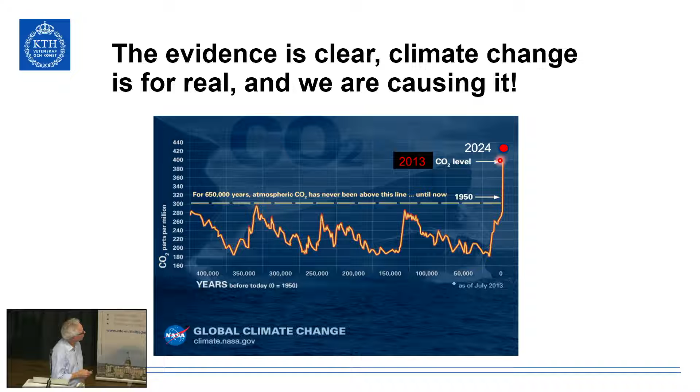And the increase is very, very rapid. This slide is from 2013, and you can see that only during the 11 years since then, the new red dot up here is a lot higher than the end of the line here. So the CO2 concentration is increasing very rapidly.

How do we know that human activities are actually behind this increase? Well, we have models nowadays which we can use to predict the temperature in the world, depending on different factors. With these programs, we can also see what the temperature would have been if we did not have emissions of carbon dioxide and other greenhouse gases. As you can see here, if we did not have carbon dioxide and other emissions, we would have had more or less the same temperatures that we had in 1850. But this is not the case.

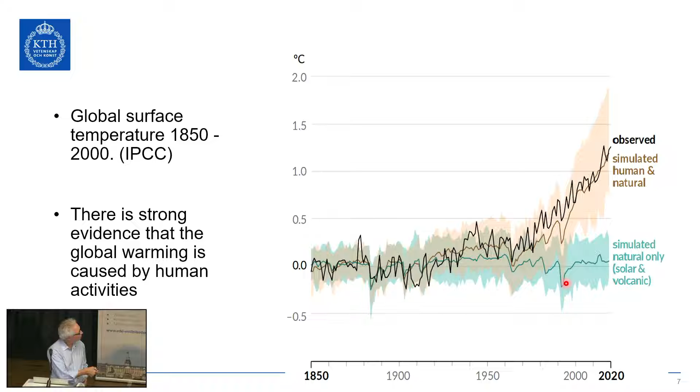And this is not the only thing. This is the sea water temperatures, and down here you can see all the different years since the measurements started, more or less.

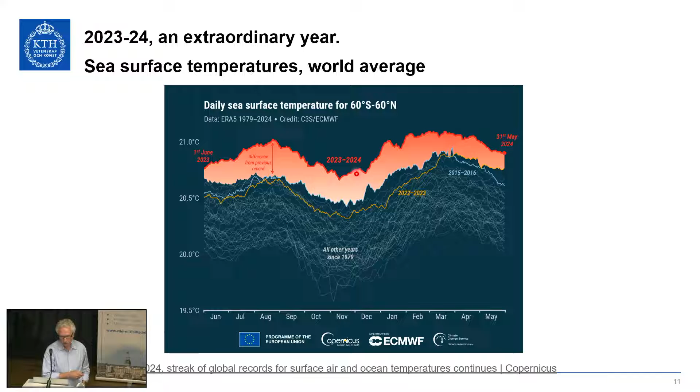And then the red part here is the gap comparing the year 2023 to 24 compared to any other year before. So there has been a drastic increase in the sea temperatures during the last year, a little bit more than a year. And this is, of course, very disturbing. We don't really understand why this is happening either, and that is even more disturbing.

So this is showing the temperatures last year, and actually last year was the warmest year ever recorded with the thermometer, so to say. And just recently there was a release of an article in Nature stating that the temperature during 2023 was the highest in 2,000 years.

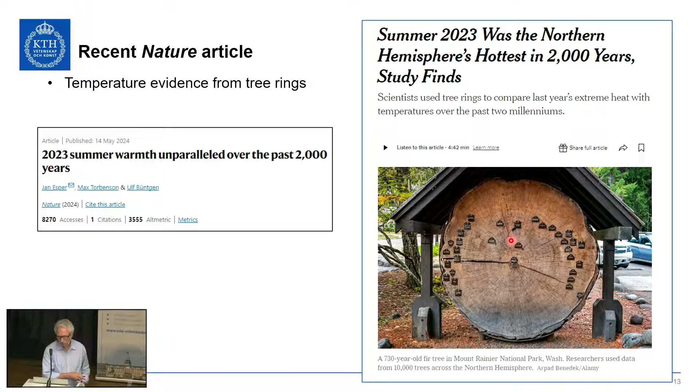And how can we know that? Well, one of the indicators we can look at are the tree rings, like you see on this picture to the right here. So if the weather has been hot, then the trees grow faster, and by that you can tell that the temperatures during the last 2,000 years has never been so warm as during last year.

So yeah, I'll come back to the levels and what we would like to see, or what we hope to see. But the drastic increase during the last year is definitely something which we need to worry about. And this leads, of course, to different problems: heat waves, droughts, wildfires, and all of these are just headlines from different journals which I picked up from last year.

And so many different things happened during the year of 2023, and this has continued into 2024 as well. And you have seen a lot of drastic changes due to this.

The ice shelf around the North Pole is decreasing, resulting in the thawing of the permafrost, which is releasing more methane from the ground, for example.

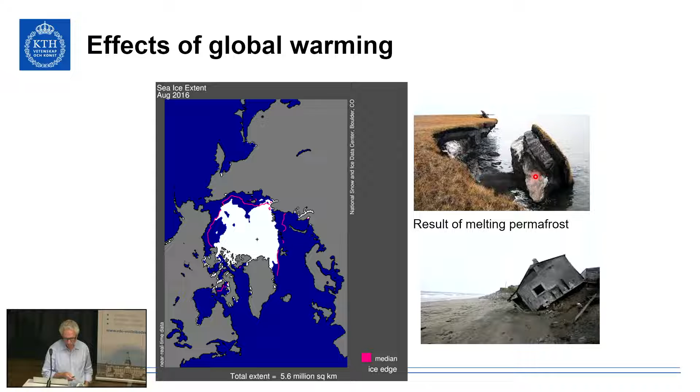But there are also some things which we perhaps do not talk so much about. And this photo shows migrants marching through Central America towards the US. And you could ask yourself, why are they marching towards the US?

Of course, they want a better life. But if they could sustain themselves in a good way where they lived from the beginning, they would not have been moving. And I'm not saying that it's only because of climate change that they try to get to the US, but I would say that this is one of the reasons. And in the future, when some parts of the world will be more difficult to live in, difficult to sustain yourselves in those parts, people will start moving.

And this will also cause social unrest, which is something which we do not talk a lot about. We talk about floods and wildfires and all of these things, but also the connection between global warming and social unrest is something I think we need to consider also for the future.

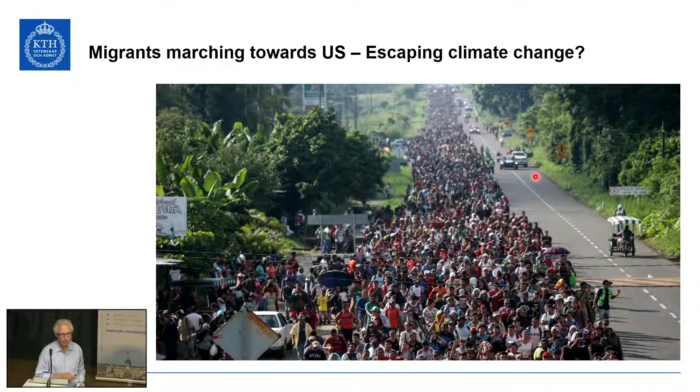So what is the solution? We have seen what is the problem. What is the solution? Well, almost all countries in the world agreed in 2015 to try to stop the global warming. And this was done through the Paris Agreement. And what does that say? Well, the Paris Agreement says that we should try to limit the increase in global temperatures to less than 2 degrees, and preferably to 1.5 degrees.

This means that we really have to phase out all fossil fuels, and we also have to do something to absorb the carbon dioxide which is already in the atmosphere. How we do that, well, that could be another lecture, but there is something called carbon capture. It's a technology being developed, but it's not sure whether we can use it to any large extent yet.

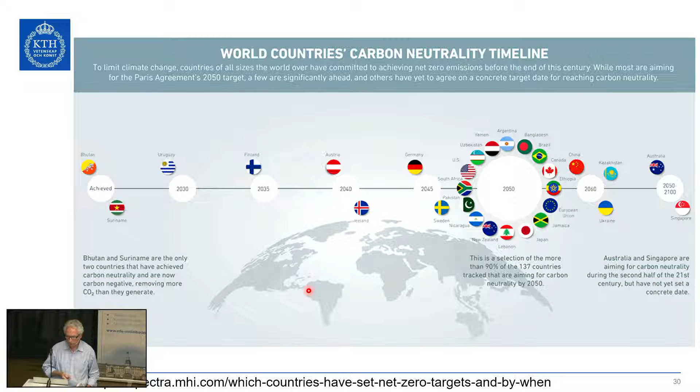This depends on what conditions your country has. If you're depending a lot on coal right now, you have a bigger problem. If you have a lot of other natural resources which can be used, like Sweden does with hydropower and wind power, then it's an easier problem to solve.

So will we reach our goals? One report which came recently from the United Nations raises some concern about this. It is perhaps not possible to reach the goals, at least not if we keep at the pace we are working right now. We need to do more.

So even if we have the Paris Agreement, it seems unlikely that we will actually reach it. And of course, we should not give up just because of that. It's important to work harder. And if we don't reach 2.5, perhaps we reach 2.6 or 2.7. We must continue working on this.

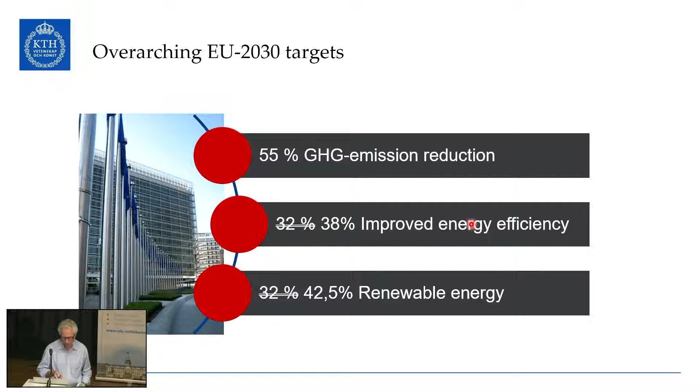Several programs are launched, called the Green Deal, and one part of the Green Deal is called Fit for 55. The 55 refers to a 55% greenhouse gas emission reduction by 2030. Just last year, these goals were made a little tougher: improved energy efficiency was changed to 38% rather than just 32%, and 42.5% should be renewable energy sources, compared to 32% according to the old goal.

So what is the strategy to reach these goals? I will talk about just one important share of energy use, and that is the energy use in the European building sector. Looking at the statistics, about 40% of all energy in Europe is used in buildings, not only for heating or cooling but also for other purposes. And the energy use in buildings stands for approximately 37% of all greenhouse gas emissions.

I would say the most common way to heat buildings in Europe is to use gas heaters. According to different sources, there could be about 100 million or 130 million space heaters in stock, and a large share of these are old with relatively low efficiency. The lifetime of one of these heaters is about 25 years, so it would take 25 years to change all of them to something better. So you can see that the European building sector can contribute a lot to decreasing carbon emissions.

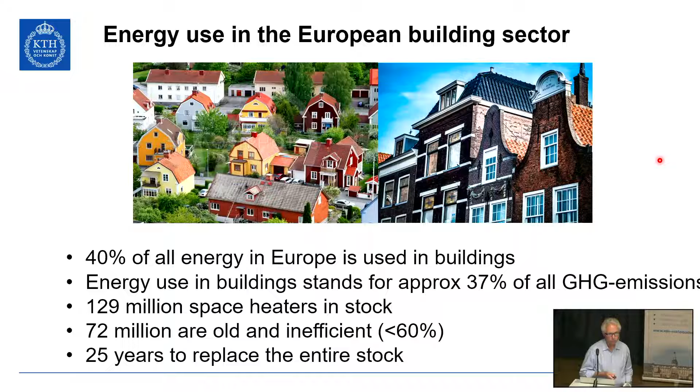I need to talk a little bit about biofuels, because one answer which is often given is that we can burn biofuels instead. But biofuels, that's basically forest or materials from farming. And about the forests, of course, the best way to decrease the carbon dioxide levels would be to allow the trees to stay in the forest, right? Not to cut them to use them for firewood.

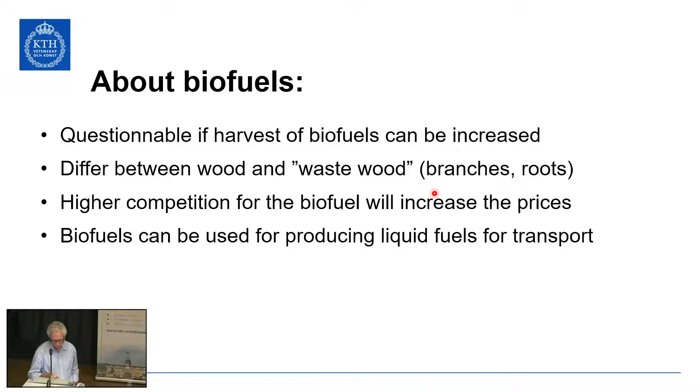In the future, when we try to phase out fossil fuels, there will be much higher competition for biofuels. So we can expect the price of biofuels to increase quite a lot compared to now. We should also remember that biofuels are a good starting point for producing liquid fuels, for example for aircraft or ships. So perhaps we should not use it for just anything - we should keep it for specific purposes, as the resources are limited.

So the reality, in conclusion so far, is that fossil fuels will be phased out - we have to phase them out. Biofuels will not be enough to cover up for the fossil fuels which we don't dig up anymore. And synthetic fuels like hydrogen produced from renewables - that's an inefficient way to heat buildings, at least. It could be used well for other purposes, for industrial purposes for example, but just for heating it would be a very inefficient way to use electricity.

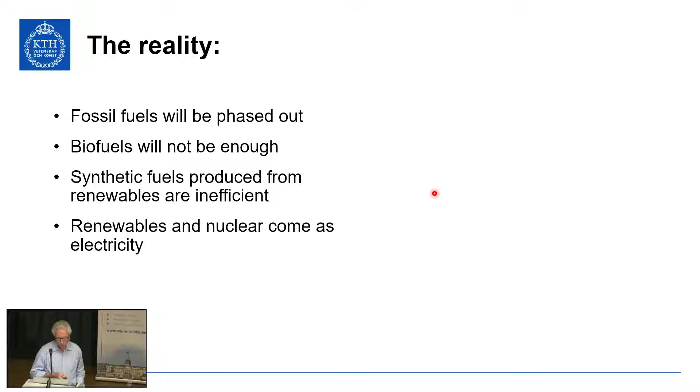And renewables and nuclear, well what is the outcome of those sources? Well, it is of course electricity. So this means that we are moving towards an electric society. We are so used to having pipelines for gas and oil, but in the future we will have a lot of electric lines instead for transferring electricity. We will use electricity for almost everything. We'll even use it to produce fuels sometimes, even though it will not be efficient, but we perhaps need fuels, or we know that fuels can be stored, so for that reason we may keep it.

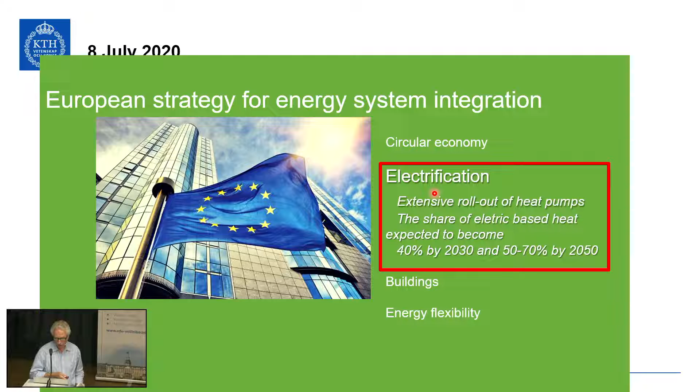And this is also the conclusion of the EU. Electrification is one of the pillars that the European Union is basing its future strategies on. And of course, electrification and heating means heat pumps. So extensive rollout of heat pumps is what is expected within the EU. You can read this in the text coming from the EU: in the residential sector, the share of electricity in heating demand should grow to 40% by 2030 and to 50 or 70% by 2050. And in the service sector, the numbers should be even higher.

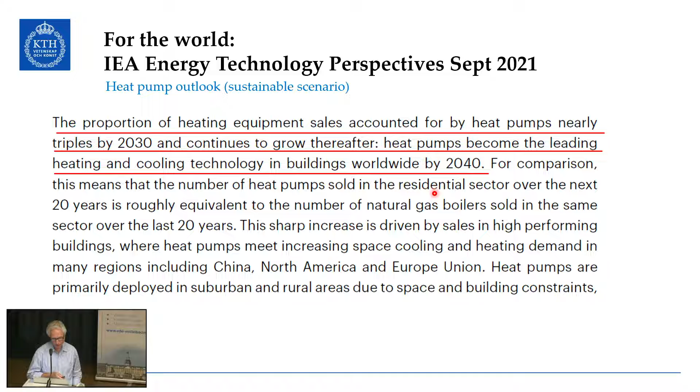So that's the expectation. And similarly worldwide, if we look at the IEA, that's the International Energy Agency, they make prognoses about energy use or the change of the energy system worldwide. They say similarly that the proportion of heating equipment sales accounted for by heat pumps nearly triples by 2030 and continues to grow thereafter. So heat pumps become the leading heating and cooling technology in buildings worldwide by 2040.

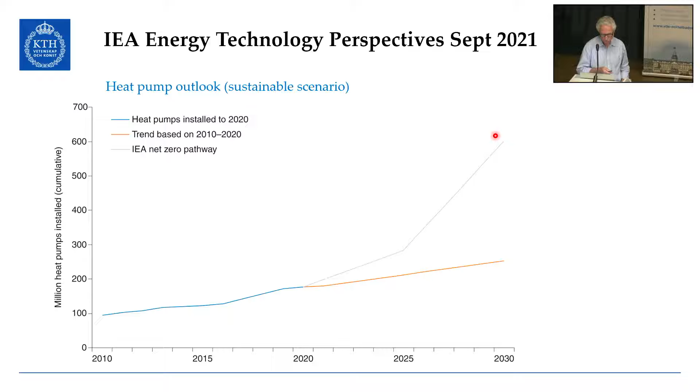In another report from September 2021, they state that we need about 600 million heat pumps by 2030. So it's an enormous amount of heat pumps which should be pushed out onto the market. This shows the trends up to now and how the trend needs to be changed in the sales of heat pumps to reach the goals which IEA thinks we need to reach to be sustainable.

If we look at the sales of heat pumps, it's actually increased quite a lot. This shows the sales in Europe from 2013 up to 2023. As you can see, the growth is more or less exponential, even though something happened in 2022. That was the winter when we had extremely high gas prices and electricity prices as well. A lot of heat pumps were sold that year, so now we're sort of back to normal again. But the trend, the expectation, is that this will increase.

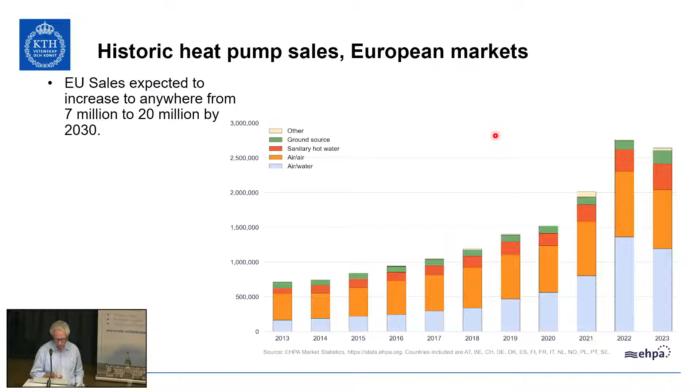This was another source, also European Union. In this source they stated that we should be able to produce or sell 10 million heat pumps by 2027. We were now at 2.5 million, so that's 4 times as much by 2027.

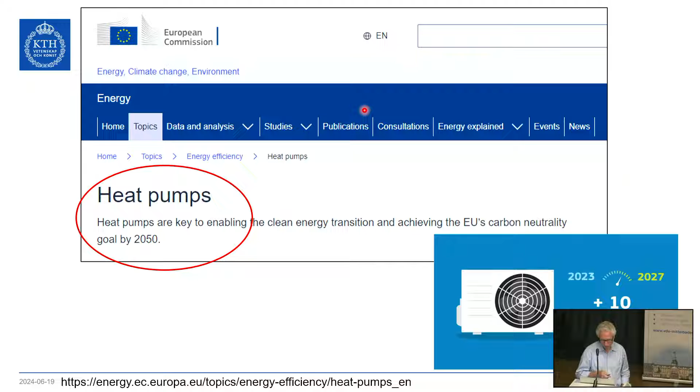The European Union is also working on a heat pump action plan, which will state some policies for facilitating the installation of heat pumps. This should have been taken before the EU elections, and it was unfortunately postponed, so we don't know exactly what will happen now, but it will probably be taken later this year with the new parliament in place.

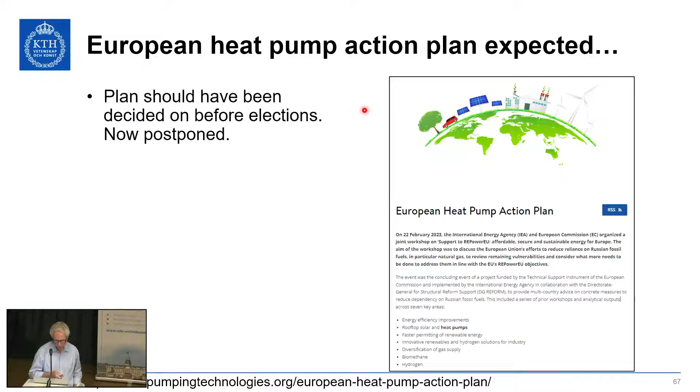But there are some countries where they already took decisions. In France, they have a national heat pump action plan, with a plan of producing 1 million heat pumps per year by 2027. So they have already taken their decision on this.

Of course, there is some resistance against installing heat pumps, and this is mainly for economic reasons. It's more expensive to buy a heat pump compared to buying a gas boiler. So the governments of Europe have introduced some measures to force homeowners to use heat pumps in the future rather than gas burners.

This map shows which countries have bans on fossil fuel boilers. It's difficult to read to the right there, but of course it depends on the country. Sometimes it's from a specific date, and these dates can be different. Sometimes it covers both oil and gas heaters, sometimes it's only oil, etc. But all of the colored countries here have some type of ban against fossil fuel boilers.

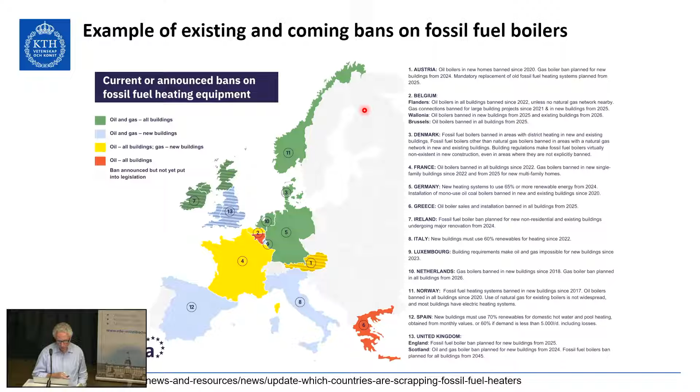If you look at the different countries, you will see that they are very differently mature in their use of heat pumps. The different countries are seen on the left, starting with the Scandinavian countries, Norway, Finland, Sweden, Denmark, and then you can see all the other countries below. This graph shows what the likelihood is that a house owner would buy a heat pump rather than another type of heating system. In Scandinavia, it's more than 90% chance that the buyer will select the heat pump, while in the UK, it's only 3% chance that the buyer will buy a heat pump and not a gas heater. So it's a big difference here between the different countries, and this is something we should recognize.

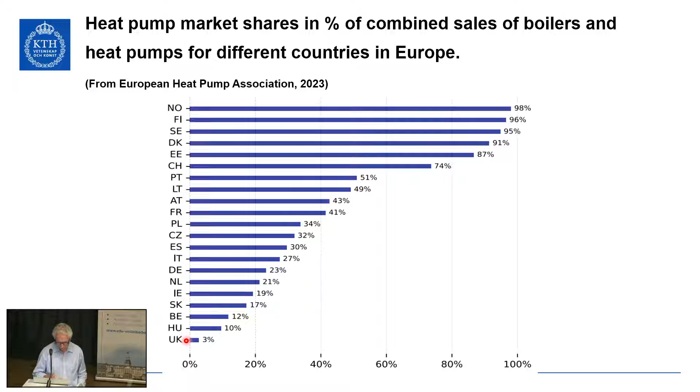But it could sometimes be less. According to the slide I showed before, there are many old heaters which have efficiencies of about 60%. This influences the total use of energy, because if we use energy more efficiently, we can reduce the total amount. So this 70% fossil fuels will be reduced to a lower number if you use electricity rather than fossil fuels. It's the same as electric cars—we know that electric cars require less energy than ordinary fuel or diesel cars.

So finally, what are the obstacles? There are some problems on the way. One problem is what we call F gases. Heat pumps and refrigeration equipment traditionally used what used to be called safety gases, because they were not flammable and not poisonous. But they turned out to have bad effects on the environment. We have heard about the ozone layer, and the newer refrigerants have high global warming potential, so we should try to get rid of them for that reason.

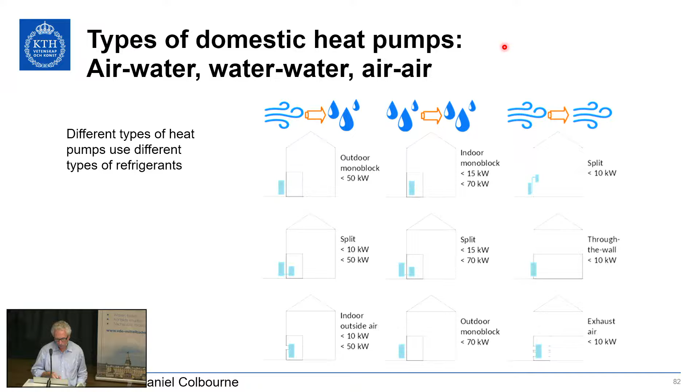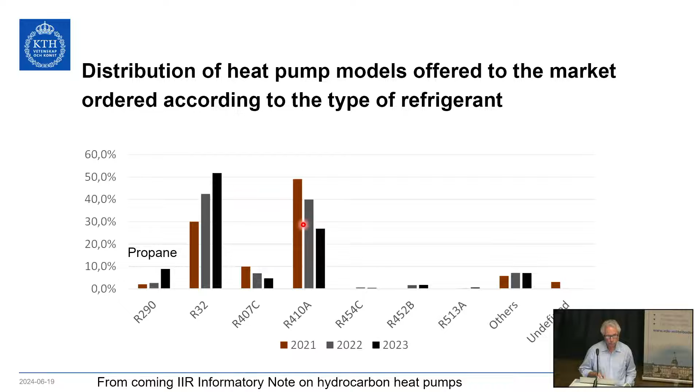R32 is a synthetic fluid which has a little bit lower global warming potential than R410A. R32 is increasing while R410A is decreasing, and then there are some others. Both me and Michael agree that we should try to use natural fluids like propane in the future, and that's much of what our research is about.

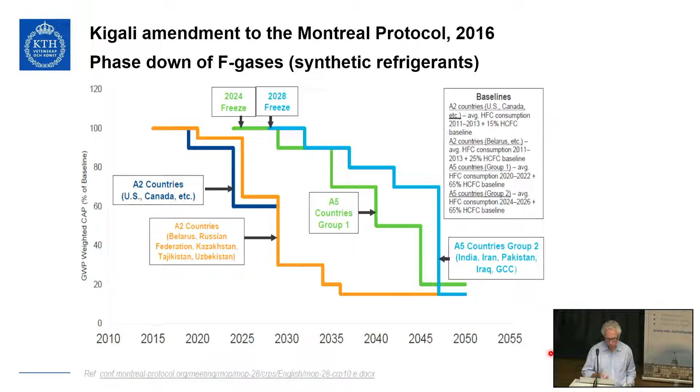We also have international agreements trying to phase out the use of F gases or these synthetic fluids. This is a diagram showing how much the GWP-weighted maximum amount is in different parts of the world, according to what we call the Kigali Amendment to the Montreal Protocol. But in Europe, we also have new regulation from just a couple of months ago called the F-gas regulation.

According to this regulation, we should phase out all use of HFCs, the most common type of synthetic fluids. There's another type called HFOs, which will be allowed and not included in this phase-out. But also for these HFOs, the last remaining type of synthetic fluids, there will be restrictions—small heat pumps, less than 12 kilowatt, small heating systems or refrigeration systems, will not be allowed to use HFOs either.

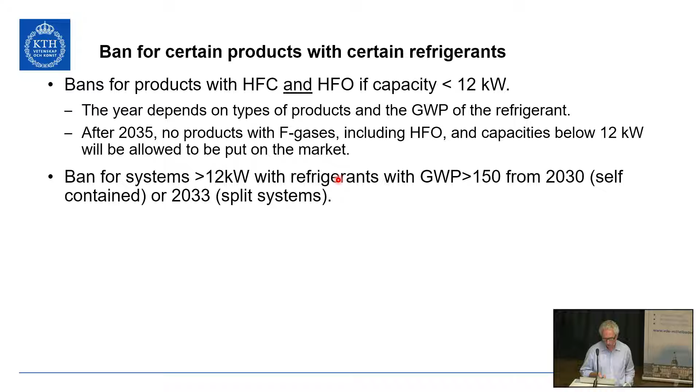So, yeah, there is another problem, and that is what is called PFAS. You probably heard about that in the news.

There is Teflon, you probably know about, and that is one of the PFAS. There is a movie about when they found out that Teflon was actually not so good for the environment. Dark Waters, I think it's called. It's interesting to see. Anyhow, so the PFAS have negative effects on people and on the environment.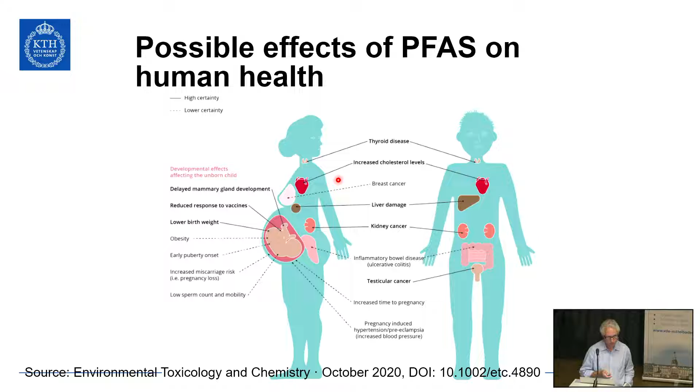That does not mean that all PFAS has such effects, but just to be sure, there is a suggestion in Europe to phase out all PFAS. So this will have a large influence on the phase out of these refrigerants which are synthetic. So almost all of them are considered PFAS.

So how will we handle the refrigerant problem? The synthetic refrigerants are strong greenhouse gases, and they belong to the PFAS group. And if they don't, they could also decompose into PFAS. And the phase out of F-gases decreases the available amount of synthetic refrigerants. And at the same time, we want to increase the amount of heat pumps exponentially, as I showed you before. So this is, you could say, a problem.

We need to develop new heat pumps which can be run on natural fluids like propane. And the natural alternatives, they are flammable, and they could also be poisonous if you talk about ammonia. So this will need to be handled in some way. But we will have to learn to design safe systems with flammable refrigerants. That is my belief. And this is something we work on, both Michael and myself, since many years.

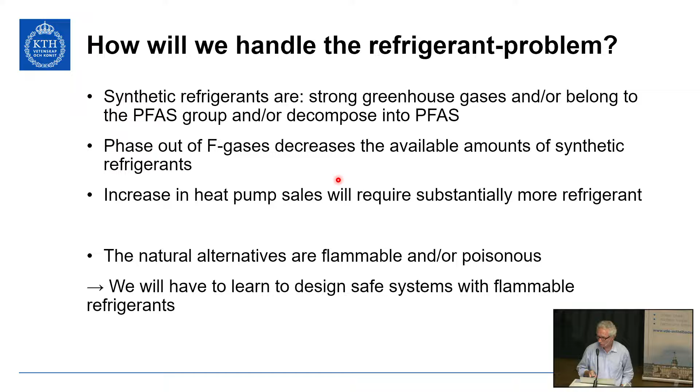So I think I will stop here and let Michael here talk more about the technical details.

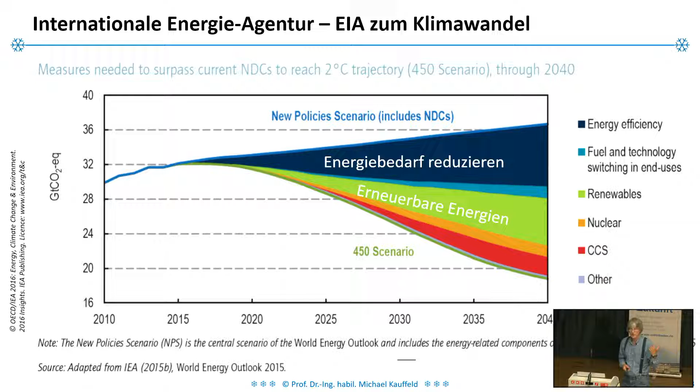This is just to support what Björn said. You can see here the buildings. They are responsible for about 15% of the greenhouse gases in Germany. And this is what the International Energy Agency says. They say that by the year 2040, which is not that far away, most of the savings come from either reducing the energy demand, making buildings more energy efficient, or changing electric resistance heaters to heat pumps. The other part comes from renewable energies, and the heat pump is actually considered to be renewable energy.

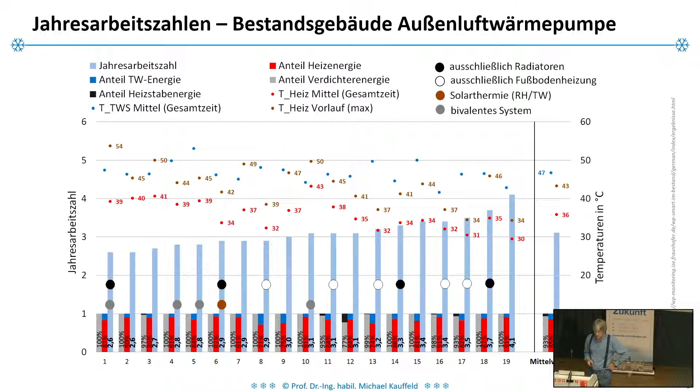Let's look at the coefficient of performance of a heat pump. This is an investigation from Fraunhofer ISE for existing buildings, for a heat pump with air source. On the previous slide, it said something around 2.4. Looking at the light blue bars here, they're all well above 2.4, so that assumption probably has to be corrected to a higher value for the air source heat pump. For water source heat pumps, the value was around 5. The green bars here are all below 5, so that value has to go down a little bit.

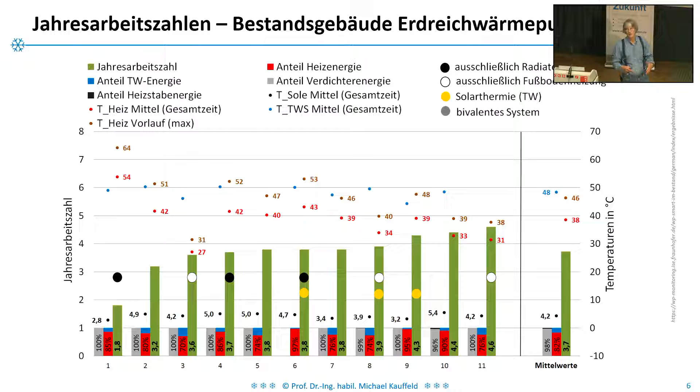There's a very bad or poor reputation for air source heat pumps, especially in Germany, where people always say, oh, you have to drill a hole in the ground, you have to spend 30,000 euros for getting the ground probes done. Bullshit. You don't need that. You can just use an air source heat pump, especially in an area like here in Karlsruhe, where we hardly get any temperatures below 0 degrees during winter any longer.

So put it here on this table for the air source heat pump. The CO2 emissions are probably lower than what is in this publication, but for the water source heat pumps, it's probably a little bit higher.

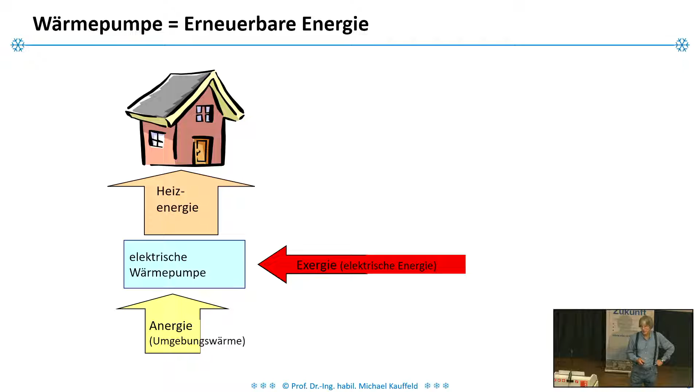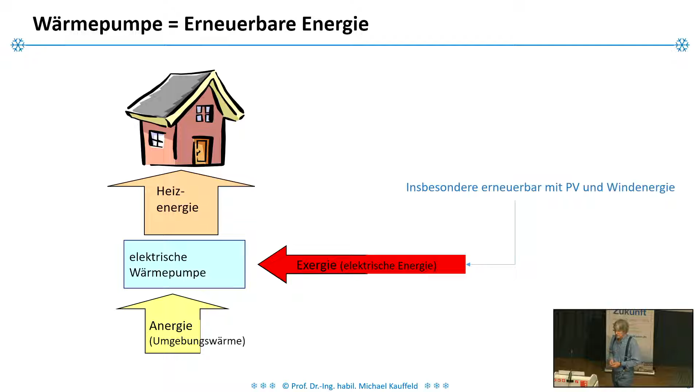Now looking at the fundamentals for heat pumps, this is the way it works: you take some energy from the ambient, you put in some electricity to drive the compressor, and then you can heat your house. It's especially a renewable system if you get your electricity from either PV, wind, or some other renewable power. Heat pumps are nothing new.

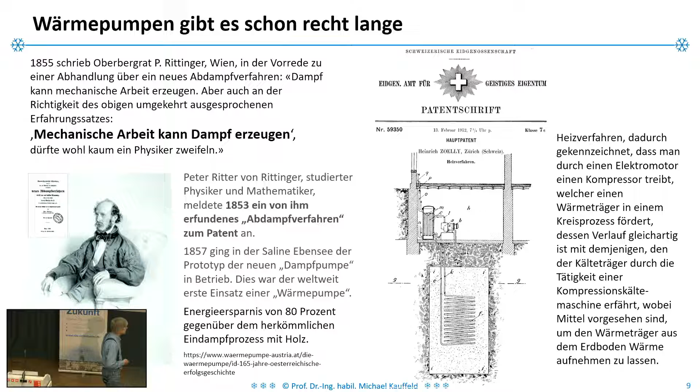This is the first description of a heat pump I found, from 1855, from a guy called Peter Ritter von Rittinger, who installed heat pumps in salt works. The first real heat pump patent I found is from 1912, from Switzerland, and this heat pump is very similar to what we have today. It's a kind of ground probe, but contrary to what we use today, where we have a water-glycol mixture, he wanted to evaporate the refrigerant there directly. This is something my PhD supervisor kind of reinvented in the 1990s, but you can see it was already patented in 1912 by someone, to have the refrigerant going into the ground.

This is one of the first really installed heat pumps, from the City Hall in Zurich in 1942, and another one four years earlier, in 1938. If you think back to what happened at that time, 1938, 1942, this was World War II. There was a shortage of coal in Switzerland, they couldn't get it, so they installed a lot of heat pumps in that period. We saw another boom for heat pumps in the 1970s during the oil crisis. We see like a third boom now, and hopefully this time it's the breakthrough for the heat pump to really take over.

If you've been asking yourself throughout this presentation from Björn and me how a heat pump works, it's just the opposite of a refrigerator. And this guy is asking himself, yeah, now I turned my refrigerator upside down, but it's still not working as a heat pump.

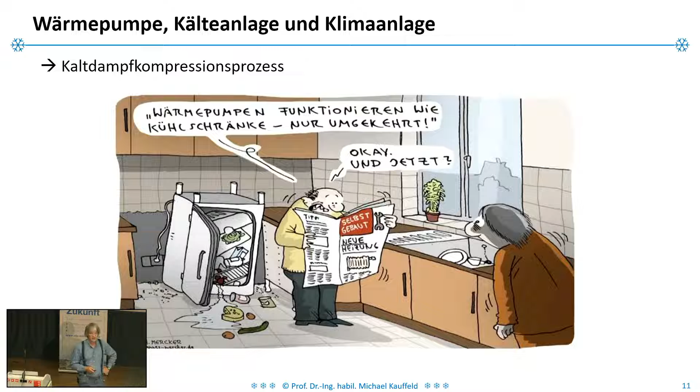So let's look at how the heat pump functions. We have an evaporator similar to what's in the fridge. In the refrigerator, it's inside to cool your butter, milk, or beer. For the heat pump, it could be in the ground, as in this 1912 patent application from Switzerland, or inside the heat pump, and then you supply some heat. In an air source heat pump, it would just be the outdoor air. The refrigerant is evaporating, and as Björn has mentioned several times, the best refrigerant for the heat pump nowadays would either be propane, or could also be CO2 or ammonia, depending on the application. So we call this thing an evaporator, or Verdampfer in German.

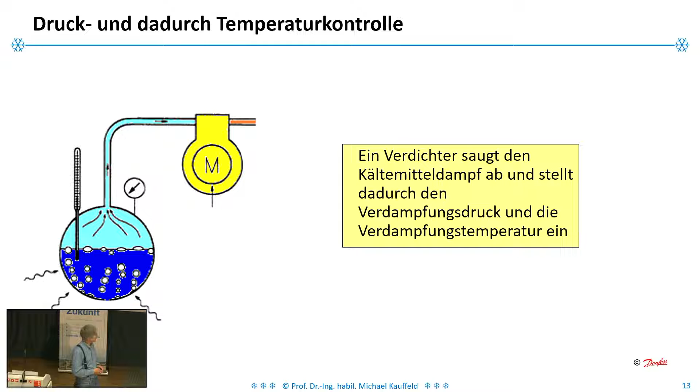The pressure inside this vessel depends on the temperature. And then we have to get rid of all the vapor. We use a compressor for that. This is electrically driven. Typically, in a heat pump, a hermetic compressor is used. We discussed today when we walked through our lab, Björn and I, that the best compressor is one that's very compact, and there are some nice developments from the automotive industry which could be used.

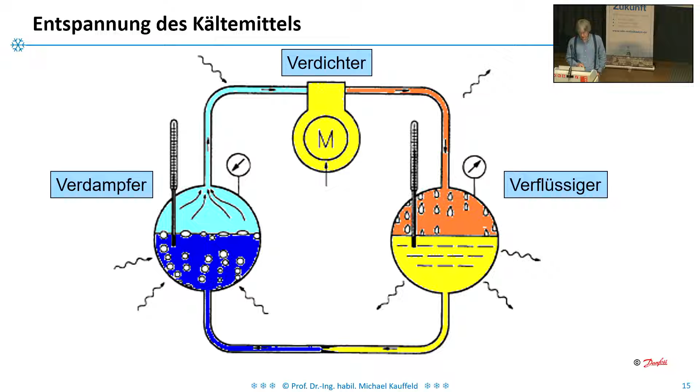Then we have to turn this vapor into liquid. This is done in the condenser, and this is where the heat pump rejects the heat to heat the house or the water. And then we have to connect this to make it a closed cycle, using an expansion valve. These are the German names: the evaporator, the compressor, condenser, and the expansion valve.

This is a little bit more advanced, and I think Björn, you had the same drawing in your presentation, or a very similar one. So this is how the heat pump works, and you can see you can use air as a heat source, or the ground, or groundwater.

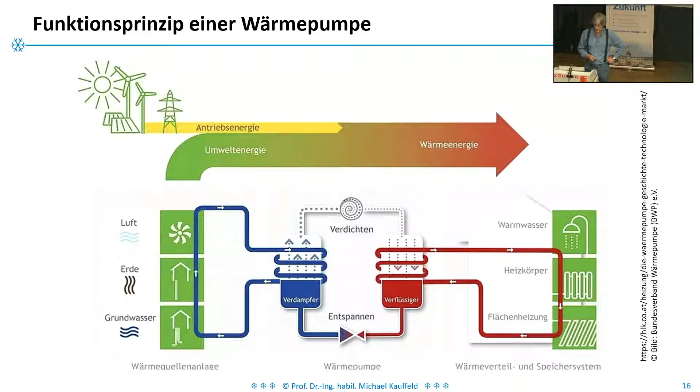This is how heat pumps look like. It could be everything contained in one housing, placed outside, typically placed outside, because you do have the compressor, and the compressor makes a lot of noise, and you don't want that inside your house. A tip: if you want to install an air source heat pump, install it somewhere the neighbor doesn't see it, because if the neighbor sees the heat pump, he thinks it's loud and noisy. If he doesn't see it, he will never notice there is a heat pump.

And then this is a monoblock system, or this is water to water. These can be made very compact. Fraunhofer ISE developed a system with 150 grams of propane. You have an idea, 150 grams of propane?

A hairspray can, like the larger hairspray cans anyone is using — you probably have one in your bathroom — has about 180 grams. So how much propane is in a hairspray can? Or we can start with a lighter, for the smokers among you. How much propane-butane mixture is in a lighter? 1 gram — a little bit more, about 2.3.

In the hairspray can, you have 180 grams of propane. And at Fraunhofer ISE in Freiburg, they managed to build a heat pump with 12 kilowatts heating capacity using 150 grams — less than what you have in a hairspray can. And there are no restrictions on where you place your hairspray can — you can have it in the bathroom, the kitchen, or the basement. But with the heat pump, there's a lot of discussion about whether it's safe to use a propane heat pump.

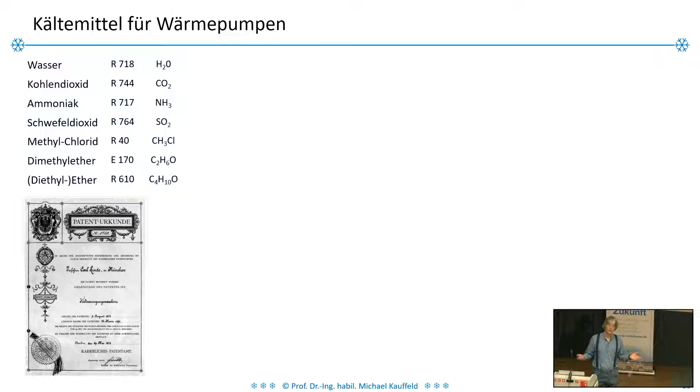Now for the refrigerants: these were the refrigerants in the very early days, all natural fluids, because there was no chemical industry. Then we got the CFCs, and they were used for virtually everything. When I tell my students that we used to clean the condenser of a refrigeration system with refrigerant from the can, they're all like, 'how could you do this?' Everybody was doing it, because all the spray cans — hairspray, deodorant, everything — used CFCs as a propellant. This was normal until the 1970s. Actually, the US was the first country in the world to say you could not use CFCs anymore in spray cans, in 1976.

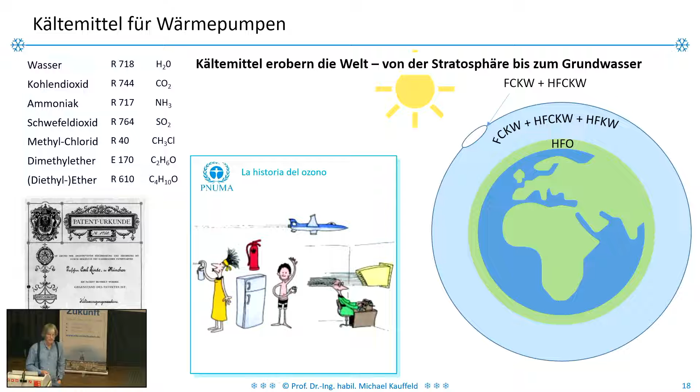So those synthetic refrigerants brought us the ozone hole, they brought us global warming, and now the new fluids, HFOs, they even bring us to destroy the freshwater sources we have. You can see here that refrigerants have conquered the world, from the stratosphere to the soil, to the ground, and this is for sure not sustainable.

The difference is 134A only has 20% TFA formed in the atmosphere. This 1234YF forms 100% TFA, so it's 5 times more. The other difference is that 134A has an atmospheric lifetime of 14 years, so whatever you blow into the atmosphere here in Karlsruhe will break down in South Africa, in Australia, in Antarctica, somewhere on the globe, but not here, because it takes 14 years.

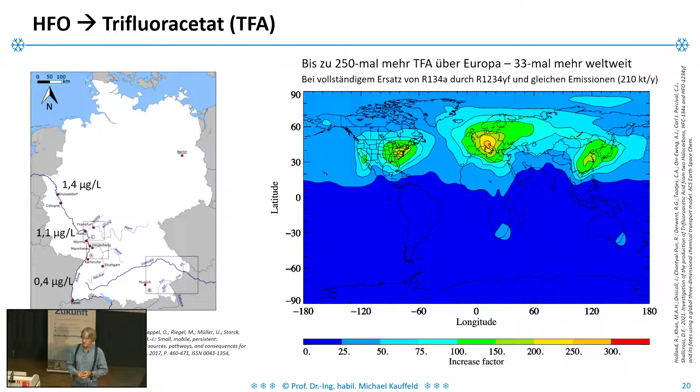Because of that, there's this proposal from 5 European countries to the EU to outlaw not only TFA, but all different kinds of PFAS, all these forever chemicals. And there's a similar announcement from California, and there are also things going on even in China on this topic. So we will see what happens.

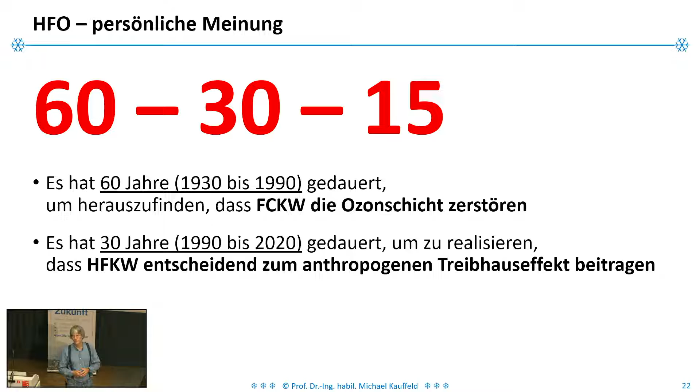This is my own personal view on those HFO refrigerants. Some of you may need a pocket calculator for calculating this, but this is the wrong way to use a pocket calculator for an easy thing like this, but our daughter does. The other thing is, this is not a calculation. What I mean is, it took 60 years to figure out that CFCs damage the ozone layer, and then the replacement fluids, the HFCs, contribute to global warming, and that took 30 years. I say it will take about 15 years to get rid of the HFOs again.

The first time I showed this slide is now 7 years ago, so there are maximum 8 years left for the companies manufacturing these chemicals.

Luckily, there are alternatives. We can have CO2, we can have ammonia, we can have propane, or isobutane as you have in your refrigerator at home. There you can actually check. There are small nameplates where you can see what the charge is, how much isobutane is in your refrigerator. Any idea how much it is approximately?

So we said 2.3 grams in a lighter, 180 grams in the hairspray can, so in the fridge, a small fridge has 25, 30 grams. The larger ones maybe 70, 80 grams. And the limit is at 150, because 30 years ago they said the typical kitchen has this size, and the maximum isobutane level you want in your kitchen is 8 grams per cubic meter, and then they came up with 150 grams. So if you have a smaller kitchen and you leak the refrigerant, you may have a problem. And if you have a larger one, then you never have a problem.

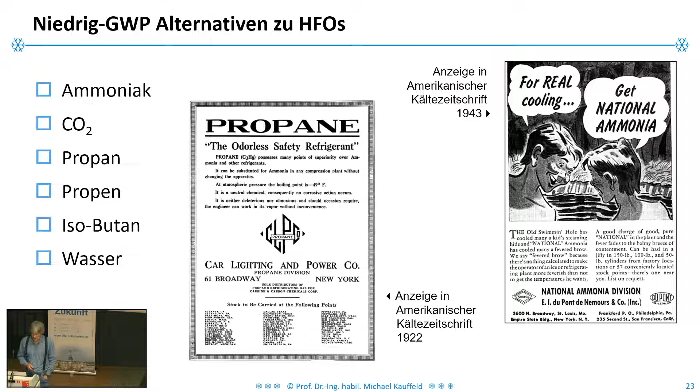So they take the water from the North Sea and pump it up with the CO2 heat pump to supply all the houses in Esbjerg with heat. If you're interested in that, you can listen to the presentation on the 7th of November. There will be someone coming from Norway who is on the project team. They will present this heat pump at our Energy for You.

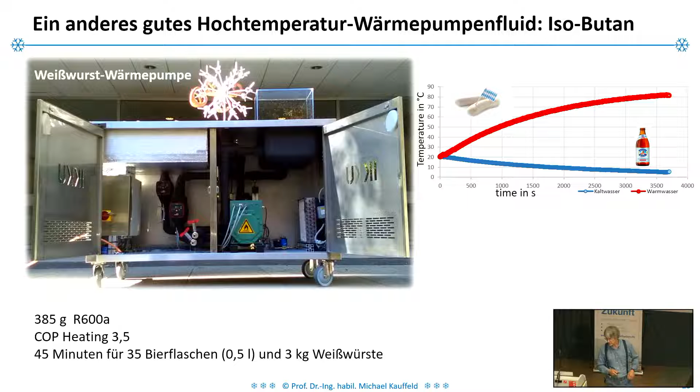We used that. We were last week in Frankfurt at the Achema with this thing. You can see down there, you have 385 grams of isobutane, so it's well below the 500 gram limit which is now set for commercial applications. The nice thing is you can only do this with isobutane. We have an evaporation temperature of -2 and a condensation temperature of +95. It's not possible with any other refrigerant in a single stage process. This was when they had their final presentation, and of course they got the highest grade.

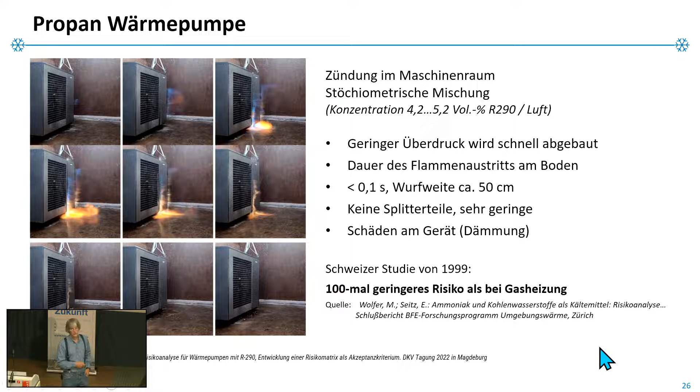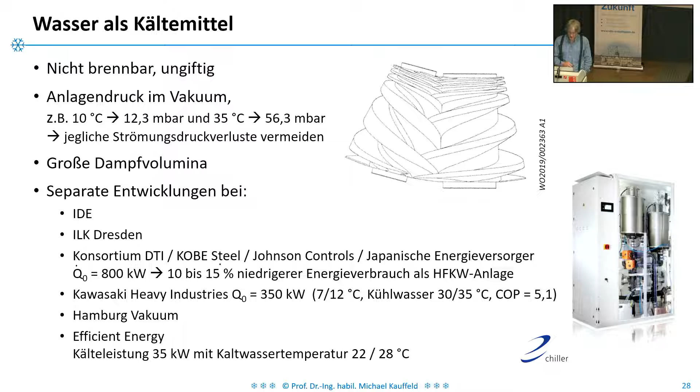If you do have some doubts, then you could go to water. It's the perfect refrigerant because it's not flammable and not poisonous. But if you look on a worldwide basis, there are more people dying because of water in their lungs than people dying with ammonia in their lungs or with a house exploding due to propane. So actually, water can also be very dangerous. There are some companies listed there who are working with water as refrigerant.

And the one I want to show you is this one. It's my former colleagues, I used to work in Denmark. That's also why I can speak Danish, unfortunately not fluent Swedish, but we can get along. Tonight when we sit in the restaurant, after the third beer, Björn and I can talk a fellow Scandinavian language. This is a heat pump installed in Aarhus, also for a district heating system.

They use water as refrigerant, and also the heat source is water. They use the water from the harbor, and the first stage is a water vapor compression heat pump, and the second stage is an ammonia heat pump. You can go there, it's like an open museum. If you ever make it to Denmark and to Aarhus, go down to the harbor. It says on the outside, Maskinhuset. You can go inside and have a look and see how the system is working.

And there you see the gray part is the water heat pump, and the green part is the ammonia.

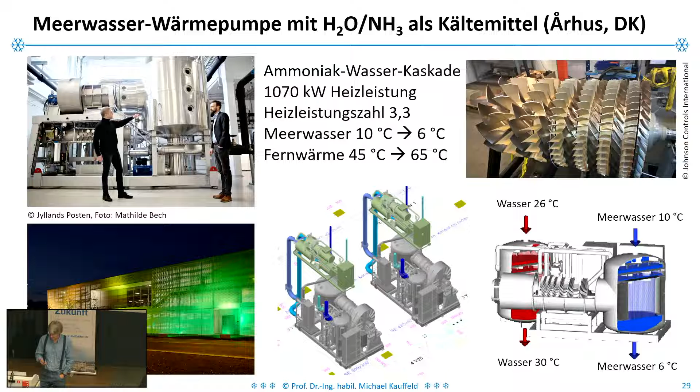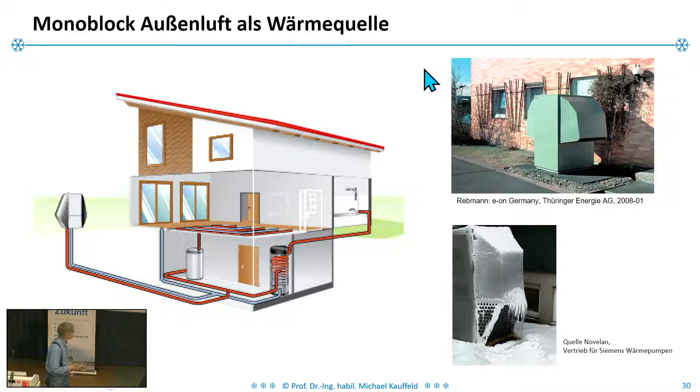Åke Melinder told me once they had a case in Sweden in a hospital with this ground source heat pump running on water ethanol, that they had a leak and couldn't find it until they figured out there was a small tap for taking a sample, and this tap was in the department for the alcoholics, and they were actually drinking it.

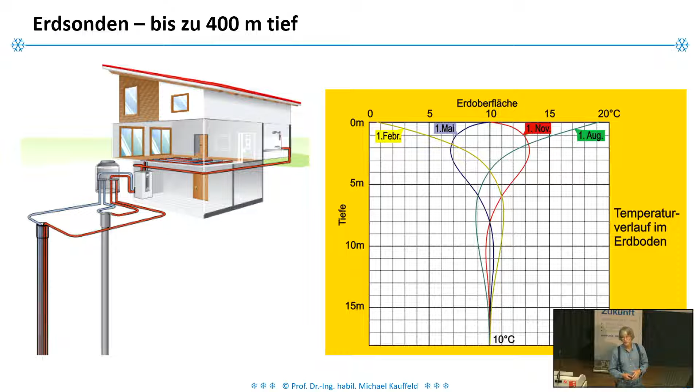And this is the typical ground source heat pump where you have ground probes in the earth, and we had here at our university a nice project some years ago. We developed a measuring system: a very small ball or sphere which can float through this ground probe and take the exact temperature distribution throughout the ground.

This is something you can also do. It's like you have one central heat pump making the first step, and then you distribute the heat in a ground network, but at a temperature of maybe 15 to 20 degrees, not 70 like a district heating system. So the heat losses in the ground are smaller, and then in each individual house you have a small heat pump. The way they do this in Fischerbach and in Bleichach is with a seasonal ice storage, and they freeze the ice, it's called ice on coil.

So they have some plastic piping inside a very big vessel filled with water. The plastic pipes run a water glycol mixture inside, and this mixture is then going to the heat pump, to the evaporator, as the heat source for the heat pump. So you have several heat exchangers.

The efficiency is not very good, and we had a European project until last year, or 2 years ago, with something like 10 partners, where we improved this system. We removed all the plastic pipes in the storage vessel and just had the evaporator of the heat pump itself produce supercooled water.

You may have experienced supercooled water yourself. Take a plastic bottle, place it in the freezer, and cool it down to -4, -6 degrees, and it's not frozen. Then you open the lid, and the CO2 initiates the freezing process, the crystallization process. That's exactly what we did in this European project: we cooled the water down below the freezing point, and then afterwards we had the crystallization.

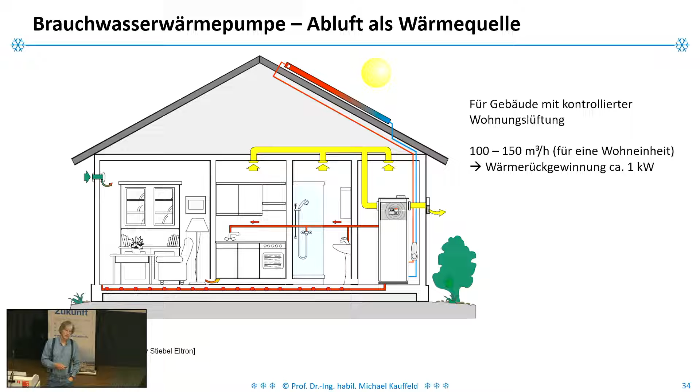The last type I will present is this one. You can of course also use the exhaust air from your building, for example, to heat hot water in a heat pump. And then, oh, I'm sorry, there was one more.

This is a groundwater water heat pump, so you can take water from the ground and pump it back. That's what they do here in Karlsruhe at the hospital. And in Rapperswil and at the Lake of Zurich, where I live, they use it for the zoo, for the elephants, to heat the elephant house.

And then in the future, and this is something Sebastian and I have talked a lot about, are these PVT collectors. This is a PV collector making solar energy into electricity, at the same time also producing heat. So you get the electricity to run your heat pump, and you can take the heat from those PVT collectors as a heat source for the heat pump.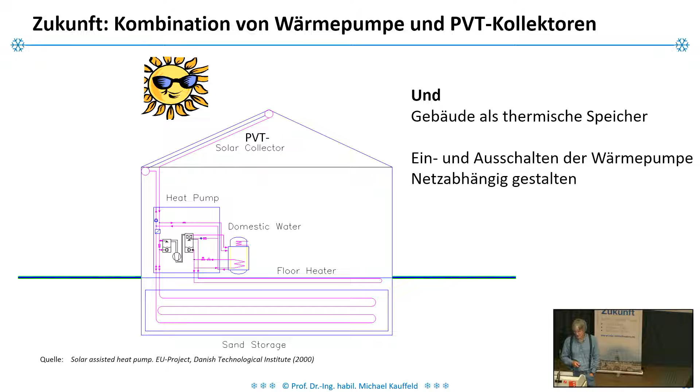And then those systems are very efficient. There is at least one company already doing this in Switzerland, in Zurich. But maybe we can still make a research project out of this, and maybe Björn, you have it in Sweden as well, even though the sun is not shining as much in Sweden as compared to here.

And then the other energy source you can use for heat pumps is all the heat from refrigeration systems. When you drive here from the university towards Entenfang, there's a commercial area with a large tire manufacturing plant from a French tire manufacturer. They have to cool all their equipment, so they have a refrigeration system with something like 1.5 megawatt refrigeration capacity.

Now the coefficient of performance of that system is not 5, it's more like 3, but that means they blow some 2 megawatts of heat into the air in Karlsruhe. At the same time, there are 39 other companies surrounding, and they all need some heating. The easiest thing you could do is just put a heat pump on top of this refrigeration system.

Andrea, we had this some years ago as a study. I don't know what happened if they installed it, but I know they did in Waldbronn. There's an ice skating arena, very nice design, using ammonia as refrigerant. Next to it is an open-air swimming pool. And they said, okay, we take all the heat from the ammonia system and put it into the swimming pool.

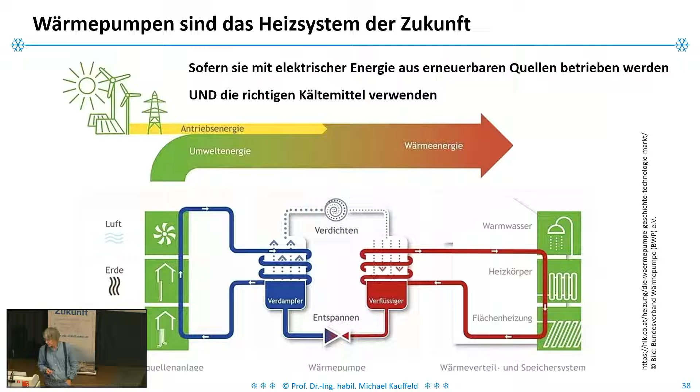Björn will also present again, and I will present something too. And then the other thing where you can go live, if you're fast enough with the registration, is the 7th of November, this Energy for You event, where we will also have a lot on heat pumps.

And in case you as students are in Karlsruhe in September, we have a one week sustainability summer school. You get free ECTS, free credit points. It's a full week program starting Monday morning at 8 and finishing Friday evening at 6 or 7. It's only €100 to participate, and we have space for 40 students. We'll have a lot of interesting exercises, excursions, technical visits, and also a lot of fun.

So, more questions? Should we take some questions? I think we still have half an hour. Ah, half an hour. If you have questions for half an hour, we can stop here, or otherwise Björn can take 10 minutes more. Okay, give me 10 minutes then.

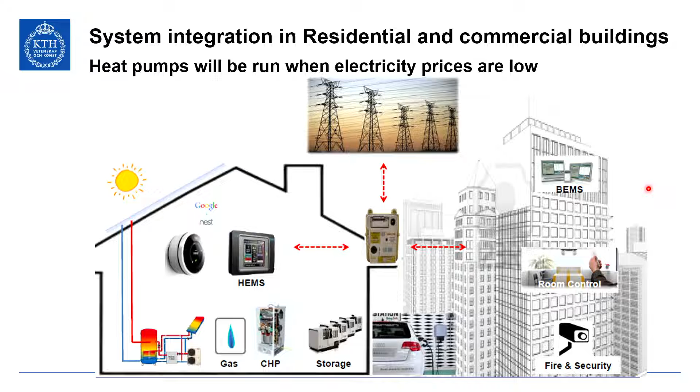This could be done with a heat pump where you also include storage. So even though the house is warm, you can still run the heat pump. In this case it's a phase change material, so you basically allow a wax to melt during the nighttime, for example, when electricity is at low cost.

That is one way to use heat pumps as part of an intelligent energy system. We already talked about decreasing the charge, and these are some examples from our lab. We also did a heat pump with isobutane, working with 120 grams and 12 kilowatt capacity, comparable to what they've now also done at Fraunhofer.

There is a lot of interesting development here, both on the compressor side and the heat exchanger side, to reach this, because previously it has not been important to have low charges, since the refrigerants were not considered dangerous in any way. They were not flammable, not poisonous, so there was no pressure to decrease the charge. But nowadays, because of flammability and also the effects on the environment, we try to reduce the charge, and this has had a big effect.

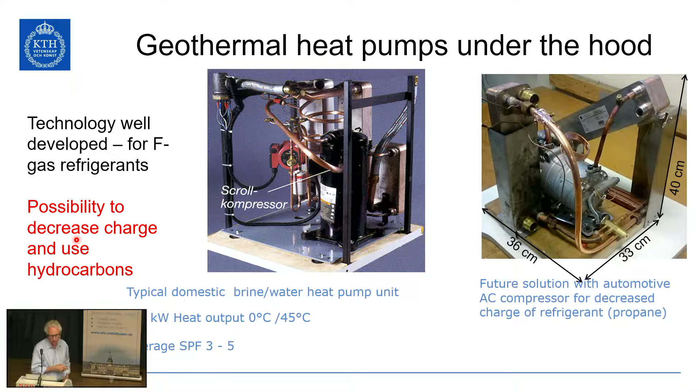You can see there are different options here. You could have one heat pump for each level, or one heat pump in the basement with water sent around the building, or you could place a heat pump outside and heat the building that way.

And of course, another solution would be district heating. District heating is not an energy source, as some people seem to believe — it's a way to transfer energy. So you still need some way to heat the water in the district heating pipes, and that should of course be heat pumps.

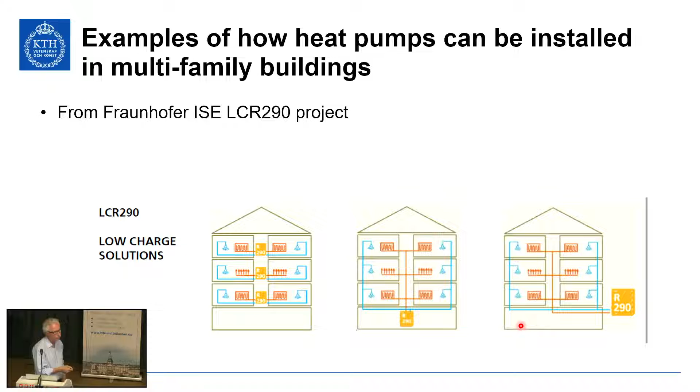Here's another slide showing a similar solution. This is a place with lots of gravel in the ground, gravel with water. Basically we have two wells, one cold and one hot. During the summer we can dump heat into one side, and during the winter we can force the water the other way. But you would still need a heat pump here to allow this to work, because the temperature of the water down there is far from what we need for heating.

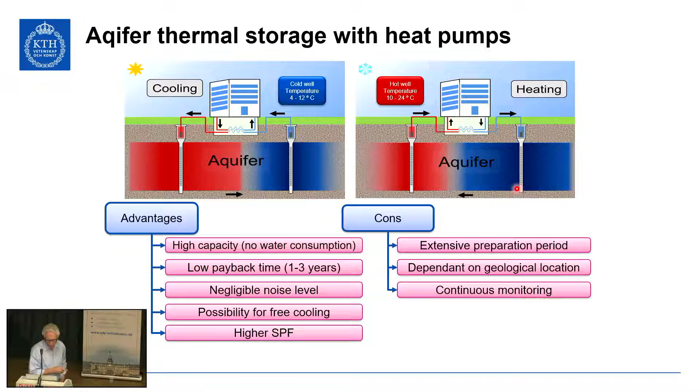What else was there? Heat pumps will be used in a lot of different applications. You may not be aware of it, but electric cars need to be heated, and since there's no waste heat from the engine, they already have a heat pump now.

Both a reversible heat pump, which can be used for heating in winter and cooling in summer. And when you buy a new dishwasher or tumble dryer, you have the option to buy a unit including a heat pump. So heat pumps are already there in some products, and I'm sure we will see more of this in the future.

Finally, something on district heating. This is showing the energy input for district heating in Stockholm from 1970 to 2017.

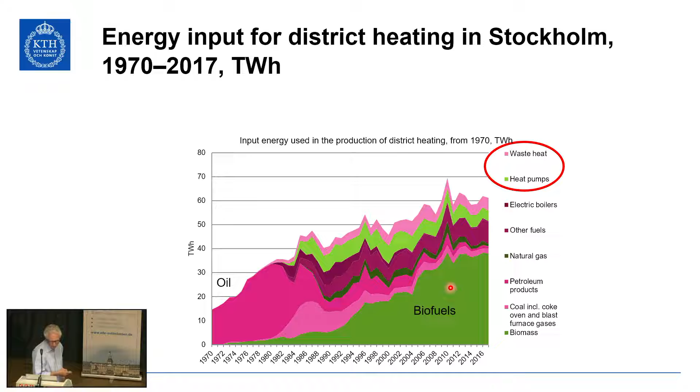Back in 1970 we used almost entirely oil, and then you can see how biofuels have taken over more and more, so there is very little fossil fuel now in district heating production. The green and purple on top are waste heat from city waste and heat from heat pumps. As Michael also said, this can be used to a much larger extent in the future, because I don't think it will be possible to use so much biofuels in the future. Biofuels will be so expensive that we cannot use them just for district heating. That's my belief. This was just a picture showing what the heat pump looks like in that case.

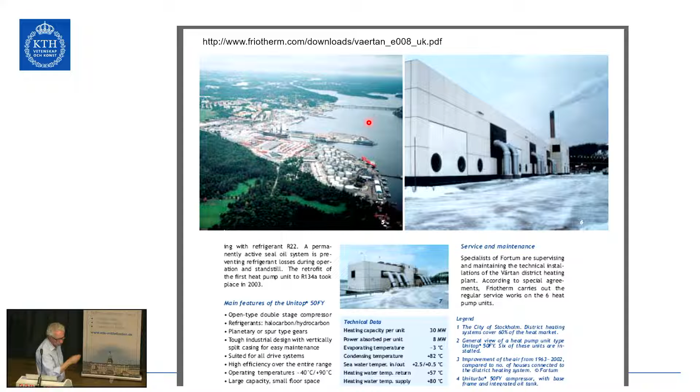Stockholm is a city of water, so there is a lot of water to take heat from. Here you can see another heat pump located on a pier, and the water is taken from the center of this bay. In winter, water is taken from the bottom, where the temperature is about 4 degrees, and in summer the water is taken closer to the surface, where the temperature could be up to 20 degrees. So a lot of water is needed if you only have 4 degrees to decrease during winter. Standing at this pier feels like standing at the back of a big ship, with a lot of water coming out from the heat pump there.

I want to mention that it's not only me or Michael who think heat pumps are important for district heating. The IEA also included text on this in their report, The Future of Heat Pumps. The decarbonization potential of district heating is largely untapped at present, with fossil fuels still supplying around 90% of district heating globally. So Stockholm is an exception here.

We used to use a lot of biofuels, but in other countries it's mainly fossil. Between 2030 and 2040, Denmark is set to provide nearly a third of its district heat supply with heat pumps. Four European countries—Austria, Denmark, Finland, and Sweden—currently have targets to decarbonize their district heating networks by 2030. That is the goal of these countries.

When we talk about district heating, traditionally this is water at temperatures of 80 degrees or so, or perhaps 100 or even 120 degrees. But you could also build other types of smart grids where the temperature in the circulating water is much cooler, so cool it could be used both for heating and cooling. This is shown in this sketch, which is actually an installation in Switzerland. In some buildings they need heating, so they use the loop as a heat source, and in other buildings they need cooling, so they use the loop to dump heat. Each building needs either a refrigeration system, a heat pump, or a combination of both.

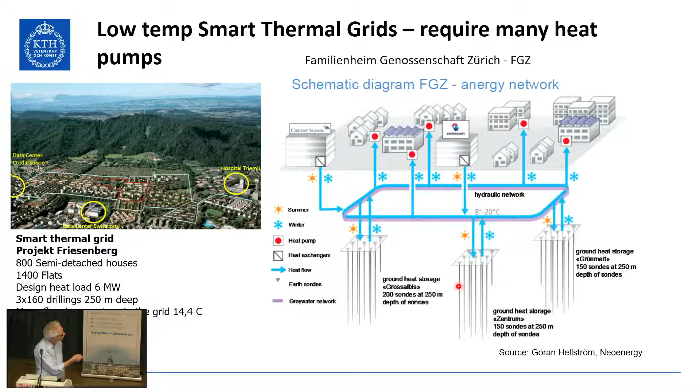To explain a bit more: during winter this loop will tend to cool down when everyone needs heating, so the loop is connected to boreholes in the ground, which are basically used as heat storage. During summer, the warm water coming from air conditioning and cooling of the buildings is pumped down into these boreholes. Then during winter, the water is pumped the other way, and the heated-up ground is used as a heat source.

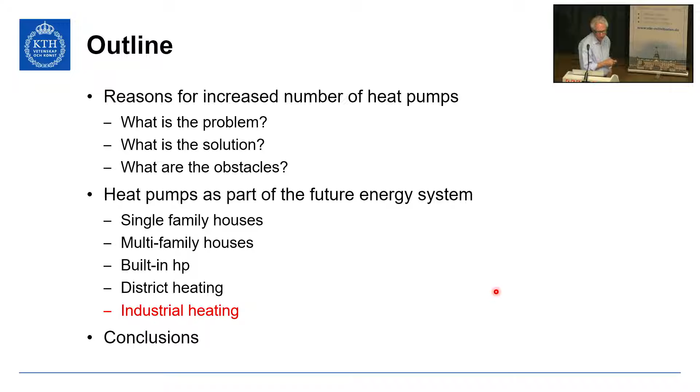150 degrees would be possible, and perhaps even 200. Compared to direct electric heating, it will always be a bit more efficient. But the higher temperatures you try to reach, if you have a low temperature source, the efficiency will be going down. But these types of machines are already available.

Here you can see on the horizontal axis the heating capacity, for different manufacturers or compressor manufacturers. On the vertical axis you can see the temperature levels which can be reached. There are already products able to produce hot water at 150 or even 160 degrees. So it can be used—heat pumps can be used also for industrial applications where higher temperatures are needed than usually required for heating of buildings.

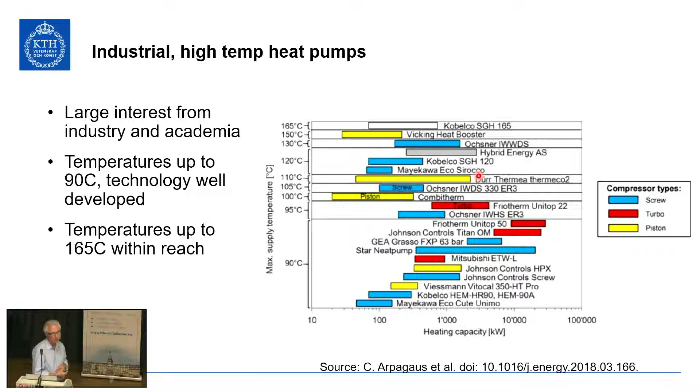So that was basically my last slide, but my conclusions: once again, global warming requires phase out of fossil fuels. I think most of us agree to that. Renewable energy and nuclear energy produce electricity, so heating will in the future be based on electricity.

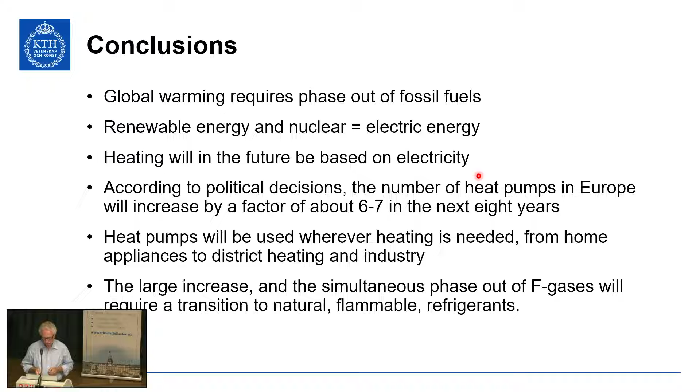According to political decisions, the number of heat pumps in Europe will increase. This factor of 6 or 7 different sources tells us different things, but there will be an almost exponential increase—that I'm sure about. Heat pumps will be used wherever heating is needed, from home appliances to district heating and industry. The large increase, and the simultaneous phase out of F-gas, will require a transition to natural and flammable refrigerants. So with that, thank you for your attention.